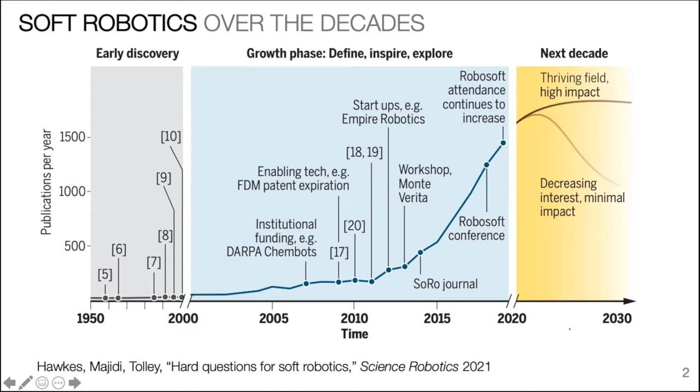First, though, I just wanted to reflect on the past and a little bit of the history of soft robotics. I think this is something a lot of you are already familiar with, and there's different ways of framing this. But in my mind, a lot of the interest in using soft materials within a robotics context really originated with research on pneumatic artificial muscles, and that was most famously done by Joe McKibben with the McKibben actuator and his work on hand exoskeletons.

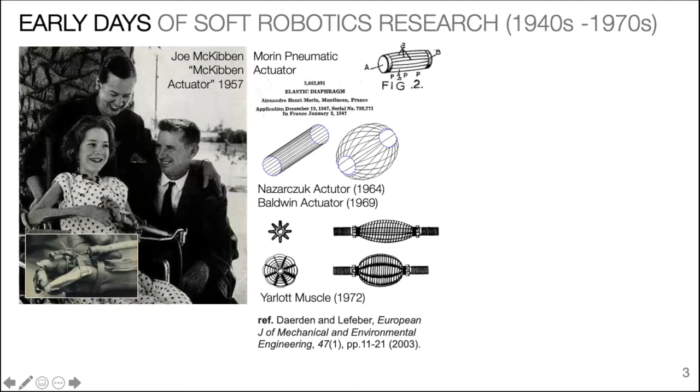But there's been tremendous other research in other types of material architectures for pneumatic artificial muscles. There's a really good review article here at the bottom that covers a lot of the progress over the decades since those early days. We call it the McKibben actuator, but that architecture actually had been introduced by other researchers in Europe and North America.

Parallel with this, there has been steady progress in the development of soft and stretchable electronics and sensors. I find it very interesting that in the late 1940s, just as we were seeing these pneumatic artificial muscles introduced, we also saw the introduction of what we now call the Whitney strain gauge, or the use of liquid metals inside rubber to create these highly elastic strain gauges and electronics. So in a sense, these two fields of soft robotics and soft electronics have over the decades been growing in parallel.

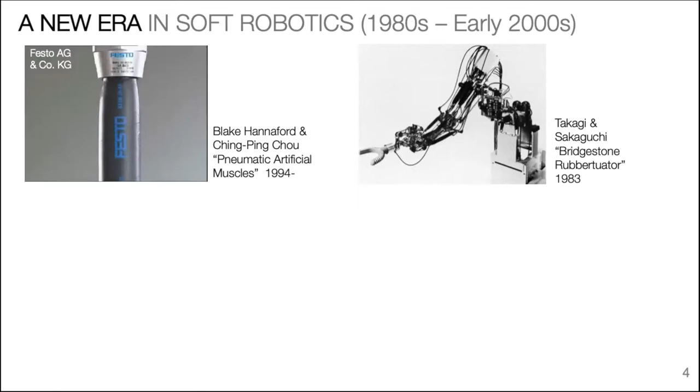I would say the 80s is when we saw this transition to a new era in soft robotics. Still a lot of continued interest in these pneumatic artificial muscles, a lot of really beautiful modeling work and really extensive studies in terms of characterizing the properties by folks like Blake Hannaford and others.

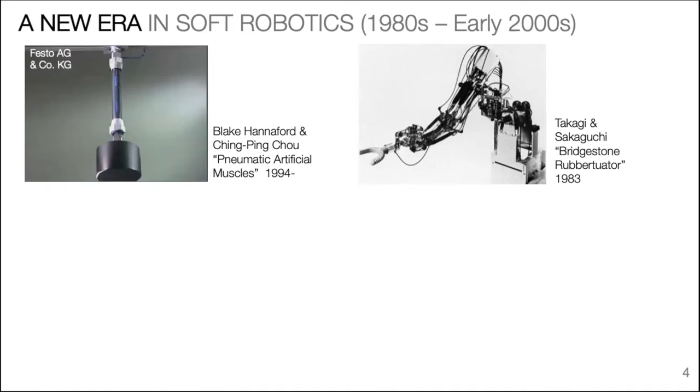And then also expanding the range of applications of robotics where these pneumatic artificial muscles can be used. And a lot of that activity started out in Japan. But I think during this time, from the 1980s to the early 2000s, we also saw, in a sense, almost a paradigm shift, or this transition away from the McKibben style pneumatic architectures to a much broader range of different types of soft, flexible actuators.

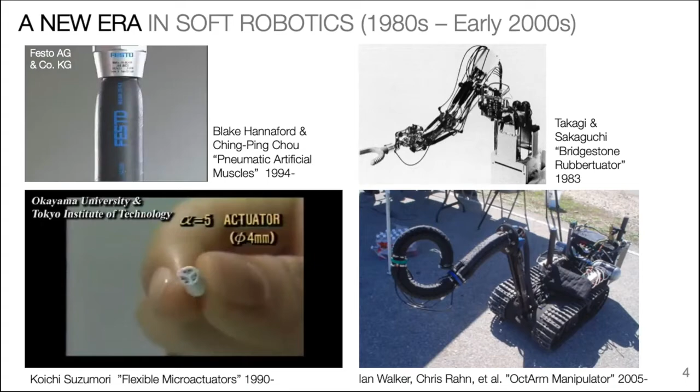So Koichi Suzumori, who gave that excellent talk here to kick off the workshop, has really been a pioneer in looking at not just changing these material architectures, but also looking at various length scales, and has done some really great work since the 90s in miniaturizing these soft actuators. And of course, there's work by Ian Walker and Chris Rahn and others around this time looking at these continuum robots like the Octarm and looking at some real world applications of that. So that represents the foundations in my mind of soft robotics.

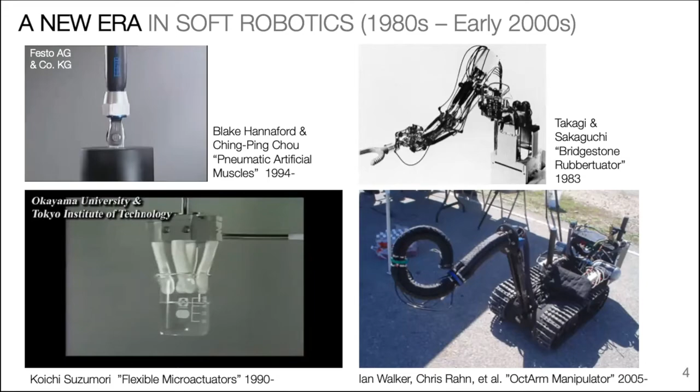But what I really want to emphasize here is that none of these publications, none of these studies up until this point in the early mid 2000s ever mention the word soft robotics. You look at Professor Suzumori's work, and he talks about flexible micro actuators. If you're just doing a raw Google Scholar search on soft robotics, virtually none of these papers, none of these studies are going to show up, right? So just be conscious of that, and be very careful, those of you who are new to the field, who want to learn more about some of the history here.

The term soft robotics really emerged a little bit more recently, and I say this represents this almost third era in soft robotics, where we see a lot of institutional funding, starting with DARPA ChemBots and the EU on the Robosoft and their commission on soft robotics, and then more recently the TRICO robot initiative from the National Science Foundation in China. And from that, I think this is what initiated this explosion of interest and activity in soft robotics, and really broadening the scope now beyond just pneumatic artificial muscles to shape memory alloys, dielectric elastomer actuators, magnetics, and all the other types of things that you've been learning about in this workshop.

So going back to this plot of publications per year, we see that in this current era of soft robotics, it was initiated by these institutional initiatives like DARPA ChemBots, but then we see this really dramatic growth, and along with that we have forums dedicated to soft robotics and exchange of ideas. So we have the Journal of Soft Robotics and also the Robosoft conferences that started in 2018.

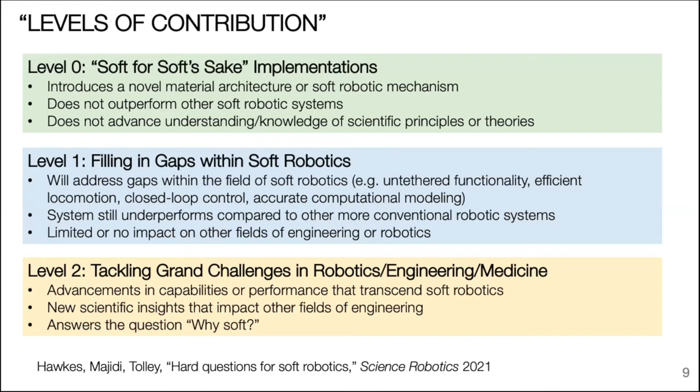And the hope here is that the work that we do and the advancements that we make actually transcend our own community and lead to new capabilities that can impact other domains. They can lead to new insights that can improve practices and understanding in other fields, and ultimately answer the question of why would you make it soft in the first place, right? Hopefully with these higher level contributions, that question is self-evident. Okay, so that's related to publication.

I mentioned in the field of gecko-inspired adhesion, success for that field has been translation into commercial products. And we're seeing that already with soft robotics. So there's been a couple of market studies now that look at soft robotics as an industry. Okay, so now looking beyond academia to how is this field making impact within the marketplace. And you have to take these studies with a grain of salt. They define soft robotics in a way that I don't think would really align very well with how a lot of academic researchers think about the field.

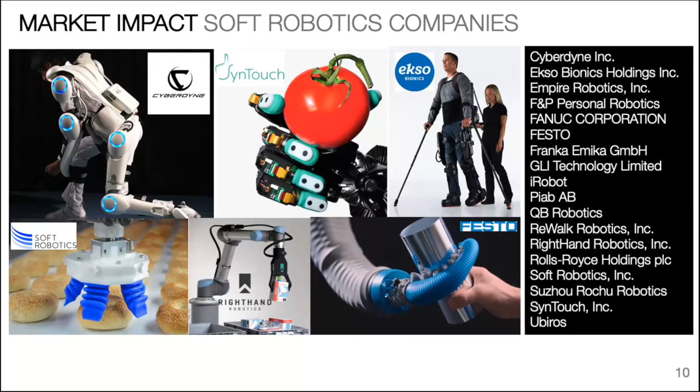And so they put a very strong emphasis on wearable robotics, exoskeletons, and co-robotics, so the full system itself isn't necessarily made out of soft materials, but they could incorporate some soft sensors, some soft actuators, or elements that allow for compatibility with the human body. Okay, so with these market studies, they take a fairly liberal definition of what they're considering to be soft robotics.

Nonetheless, what we see consistently with all these studies are these pretty impressive projections for growth for the industry. So, for the most part, if you just aggregate the valuation of all the companies within the space, the total valuation of the industry is on the order of about $1 billion today. But the expectation is that's going to increase by several fold over the next few years. And so, these 40% year over year projections suggest that every 2 years you're going to see a doubling in the size of the market.

So another useful insight from these market studies is to break down soft robotics into these different categories. Again, you see wearable robotics and co-robotics dominate. Again, it's up to you to what extent you want to consider those as soft robotic systems. But what's really nice to see here is inflatable systems, soft grippers, medical and healthcare type systems, which are I think universally accepted to be soft robotic systems, also do represent a fairly big chunk of the market, and they will also grow over these next few years.

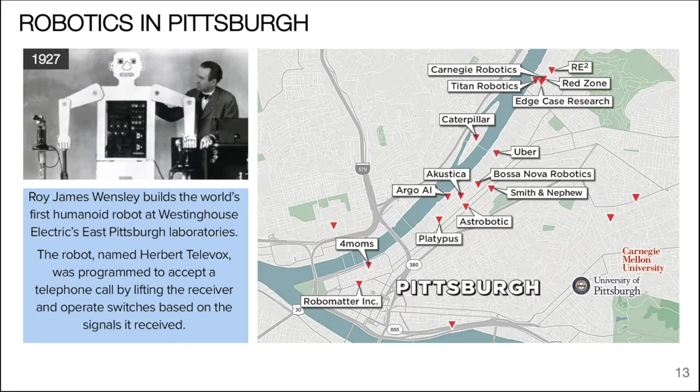In some cases, I'm sure they will, but I think really the best outlook for the field is if we're ourselves kind of aggressive in entrepreneurship and commercial translation.

I have just a few minutes left, so I'll quickly go over these slides. There have been some takeaways, at least anecdotally for me, in terms of what it takes to get these products and technologies out in the marketplace.

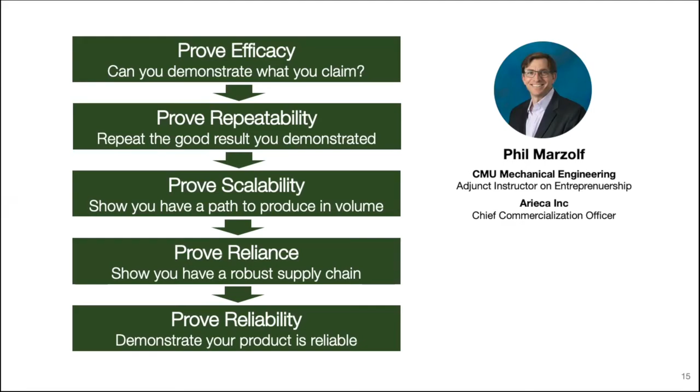There's a lot of challenges that go well above and beyond what we've experienced in the research lab to create these — technologies that not just work, but work repeatedly under any condition, within an industrial or consumer setting, and that can be mass produced so that everything is robust and reliable from a manufacturing supply chain perspective. There's a lot of hurdles there, and any one of these hurdles could potentially represent a bottleneck.

But with all that said, as challenging as it is, there's been plenty of examples where soft materials have been truly disruptive and revolutionized different types of industries and practices. Everything from tires — the original early bicycles had metal quote tires or rimmed wheels, and that transitioned to pneumatic tires that went on to dominate.

Same goes with balloon angioplasty, which replaced much more cumbersome rigid dilator technologies. And we're also recently seeing microelectronics technologies transition into soft lithography, soft microfluidics for lab-on-a-chip technology. So plenty of examples in the past, and I think that bodes well for the field of soft robotics.

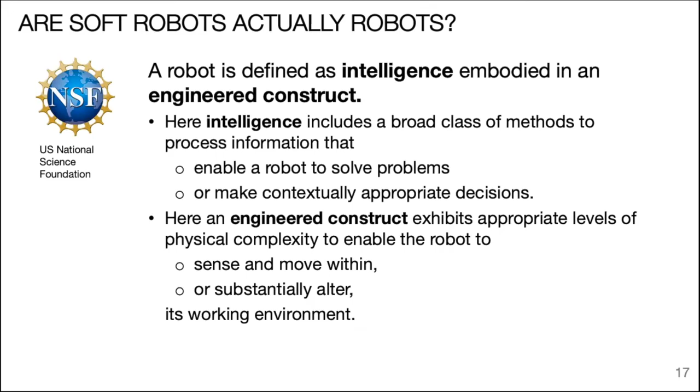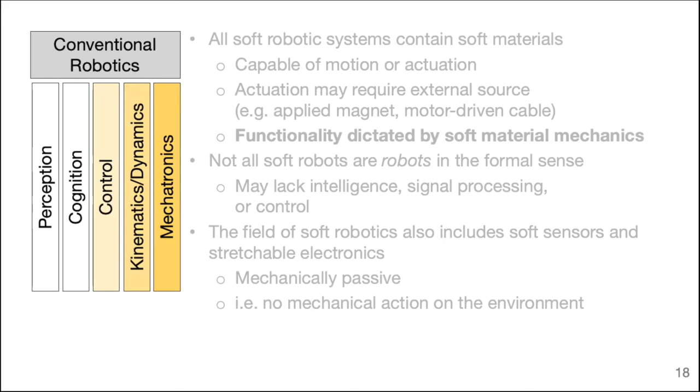Just out of time here, so I'm not going to dwell too much on this. Bottom line is I want to argue that another path to success for the field is not necessarily to limit ourselves to robotics, but to think a little more broadly about what we're doing in soft robotics as being more under the umbrella of soft matter or soft materials engineering.

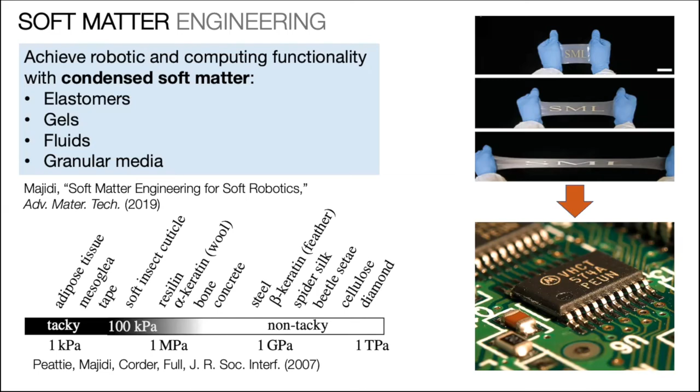So really taking the practice of condensed — the science of condensed soft matter physics — and putting it into practice: engineering robotic and computing systems or medical devices, where elastomers, gels, fluids, and granular media have a central role in dictating the functionality of those systems. I'll end here — sorry, I went a bit over time.

I don't know if there's going to be time for Q&A, but...

Things to think about are: what does success look like for the field of soft robotics? Is it important for soft robotics to gain mainstream acceptance by other roboticists? Or is it fine for us to branch out and focus on other application domains without worrying about adhering to the dogma and rigor of robotics? This also gets into semantics, just as bio-inspired engineering and biomechanics morphed into soft robotics, could soft robotics as a field morph into other domains? I think we're seeing some early signs of that, but that's something to reflect on.

All right, thanks a lot.

Thank you very much, Professor Majidi, for this great talk. I knew what would come, but I was impressed again by the research you did, because I think it's very, very relevant to the whole field, that we have to really think about these points.

One quick question from me: do you think we have to stop now playing around with different materials, hoping we get an actuator out of it that can maybe do something? Is it now time to move forward from this kind of research to application-driven research?

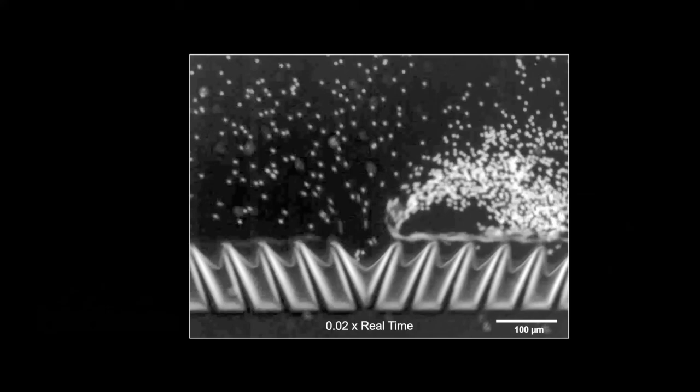Normally, a biological cilia undergoes a whip-like non-reciprocal motion. This is needed to perform propulsion at the microscale in a low Reynolds number regime. However, our ciliary bands undergo just back and forth reciprocal oscillation, but in the kilohertz range, and therefore are able to produce propulsive forces on a microrobot, which I'll show you later, even though they undergo reciprocal oscillations.

For this workshop, I would like to highlight the materials that we used. We used a straightforward photopolymerization setup that we built on an inverted microscope. The photosensitive polymer mixture that forms the microrobots consists of 50% polyethylene glycol diacrylate with a molecular weight of 700.

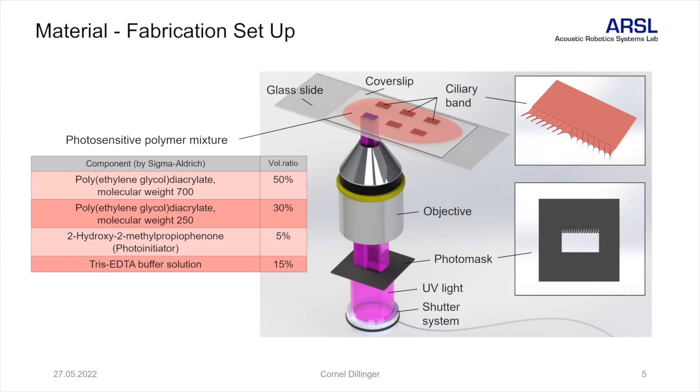We use 30% PEG with a molecular weight of 250, we add 5% of the photoinitiator, and we add 15% of a buffer solution in order to make the cured material softer. These microscopic structures are then placed on a glass slide whereon we glue the piezoelectric transducer in order to stimulate and actuate an acoustic wave in the acoustic chamber.

Once the chamber is set into oscillation, this oscillation is transferred onto the ciliary band and we see this nice acoustic streaming pattern. Using this principle, we built a bio-inspired microrobot whose model organism is the starfish larvae.

When we place such a fixed microrobot next to an actual starfish larvae, as you can see on this slide, you can see that we are very nicely able to mimic the flow behavior. Pay attention here to the time resolution: on the left, the video is sped up by 8 times. We had to slow down to have comparable streaming velocities by a factor of 20.

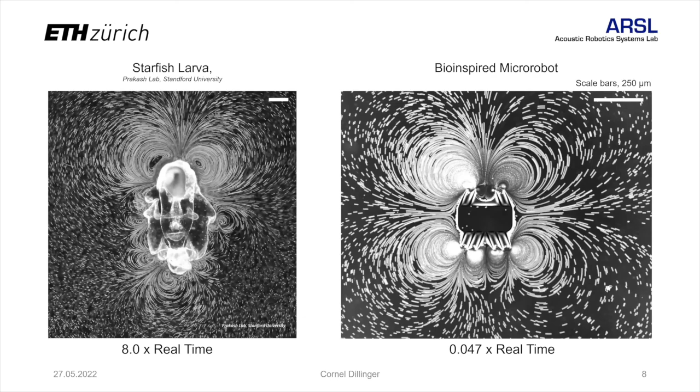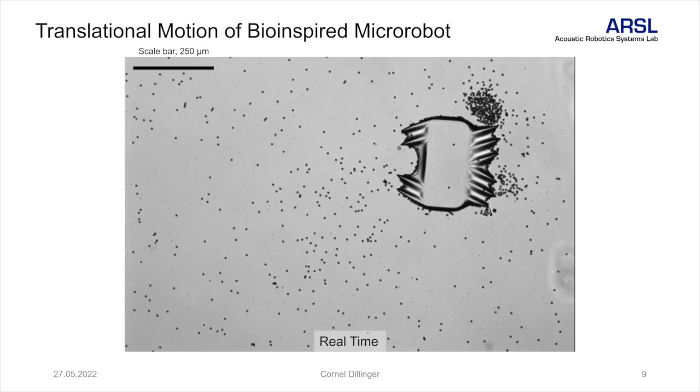Once such a robot is released, we were able to imitate translational motion of this bio-inspired microrobot that imitates the swimming behavior of the starfish larvae. But we were also able to imitate the trap and food transport mechanism of the starfish larvae.

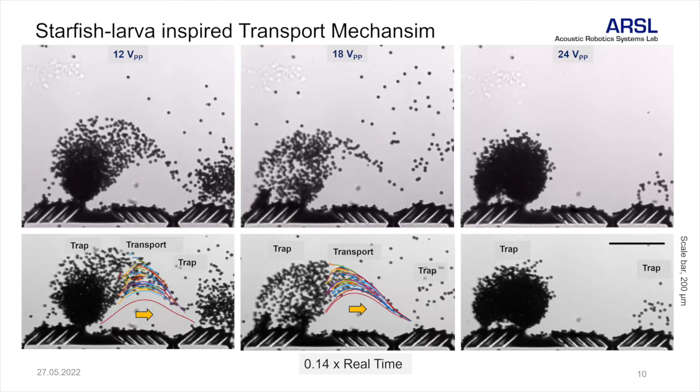By placing a plus ciliary band just next to a minus ciliary band, we were able to imitate a trapping function, and along the surface, a transport mechanism, which the starfish larvae uses to trap plankton and guide this plankton towards its mouth. With this, I thank you for listening.

I'd like to conclude by saying that in this project, the soft material itself is not really new, but I think the actuation of a soft material with ultrasound is quite new. Thanks for listening, and enjoy the last day of the conference.